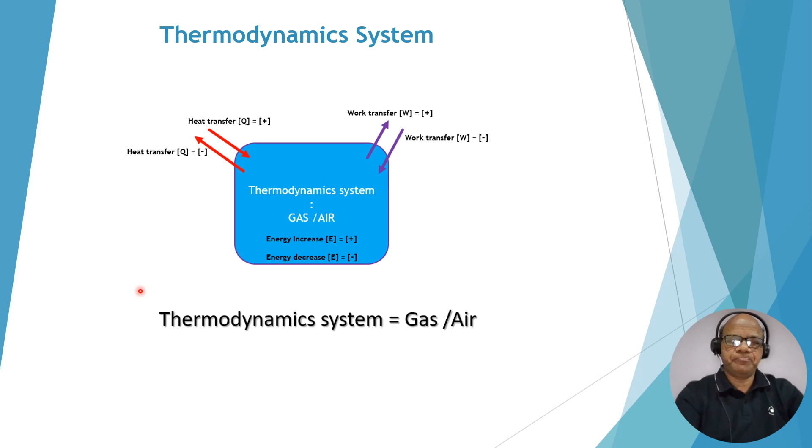So the focal point of the thermodynamic system is the gas.

Types of thermodynamic systems: open system, closed system, and isolated system. In an open system, there is a flow of mass and energy exchange. In a closed system, there is no exchange of mass but only energy exchange. In an isolated system, there is neither exchange of mass nor energy, so it is called an isolated system.

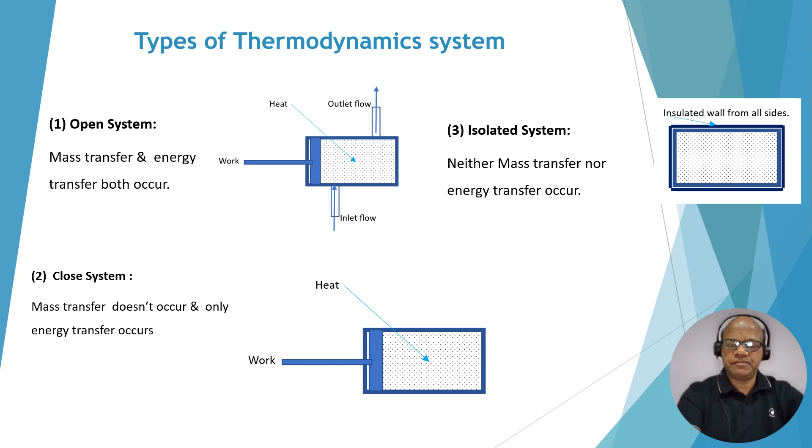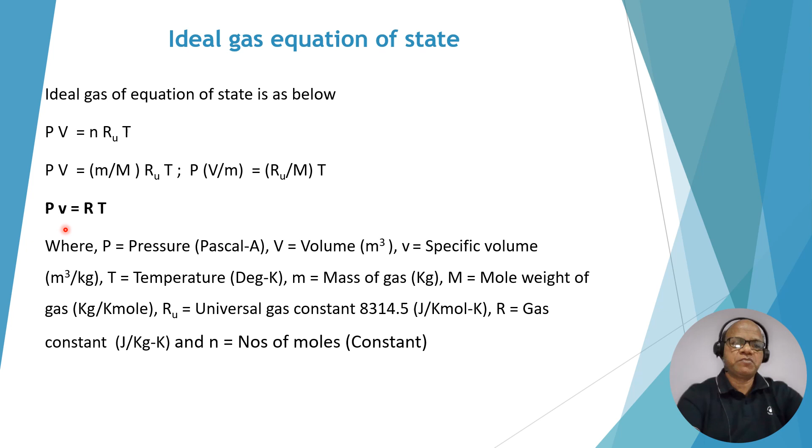Ideal gas equation of state: PV equals nRuT. On simplification we can write P small v equals RT, where P is pressure, v is specific volume, R is the gas constant, and T is the temperature.

Work done on a closed system. For the closed system, work done is written as the integration of PdV, and the area under the curve on the x-axis, that is on the PV diagram, is called work done or work transfer.

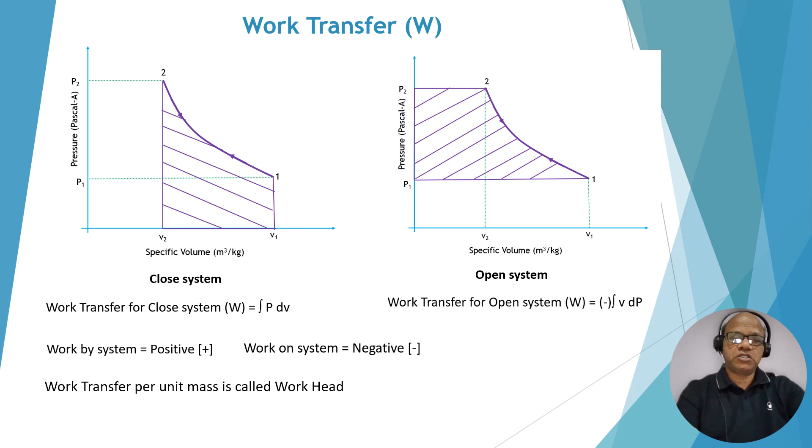Similarly, for the open system, it is written as minus VdP, and the area under the curve on the y-axis on the PV diagram is called the work done for the open system. Work done by the system is positive, work done on the system is negative, and work done per unit mass is called the work head or head.

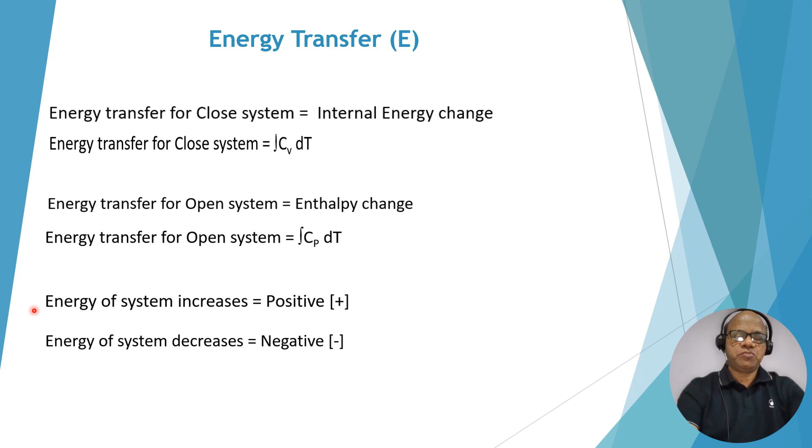Energy transfer for the closed system is called internal energy change, expressed as the integration of CvdT. Energy transfer for the open system is called enthalpy change, written as the integration of CpdT. Energy increase of the system is positive, energy decrease is considered negative.

The first law of thermodynamics can be used to find out the heat transfer. So heat transfer is equal to work transfer plus energy transfer, Q equals W plus E. Please note that the first law of thermodynamics assumes the efficiency of thermodynamic machines is 100%, meaning there are no losses during transfer of work, energy, or heat. So the first law of thermodynamics considers everything ideal, with no losses, 100% efficient.

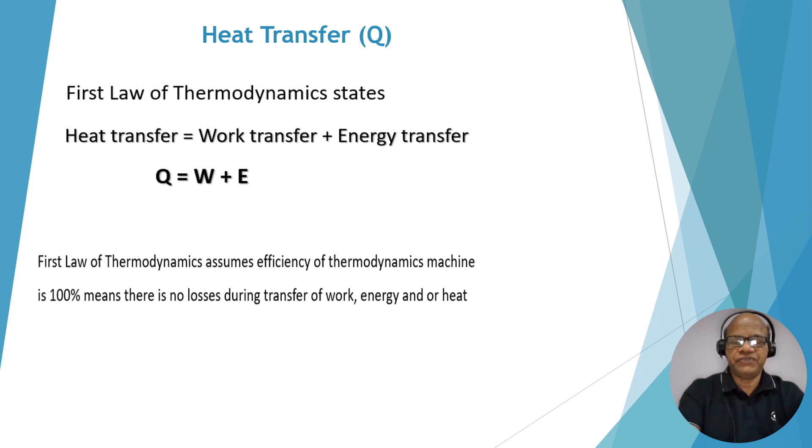The constant volume process is also called the isochoric process for the ideal gas. Let's say on a PV diagram, you can see the 1 and 2 process at constant volume, and similarly the 2 and 1 process as well.

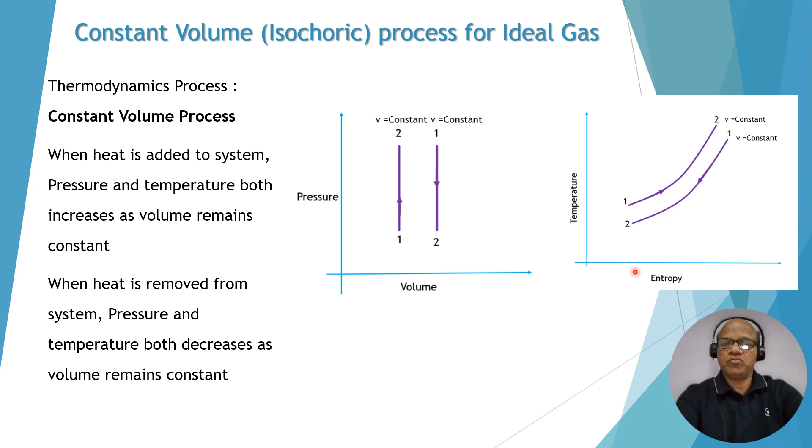In this process, heat is added; in the reverse process, heat is removed. Similarly, on the TS diagram, from 1 to 2, heat is added, temperature increases, entropy increases. From 2 to 1, heat is removed and entropy drops on the TS diagram.

So for the work transfer per unit mass for the closed system: since V is constant, we can write PV equals RT, so P1 equals RT1 and P2 equals RT2. Therefore P2 by P1 equals T2 by T1, and also we can use Cp minus Cv equals R for the ideal gas.

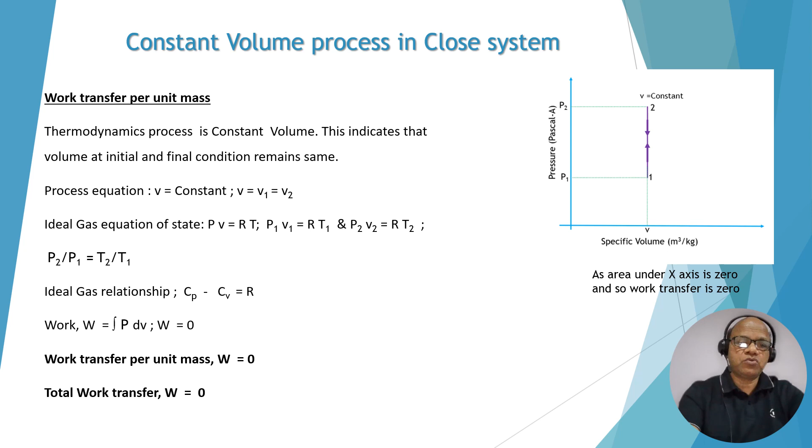Work done for the closed system is PdV; since there is no change of volume, the work is zero. You can see the area under the curve on the x-axis is zero because it is a straight line, so the work transfer per unit mass is zero, and the total work transfer is also zero, because multiplying by mass still gives zero.

Now for the constant volume process, the energy transfer for the closed system is written as the integration of CvdT. So Cv(T2 minus T1) is the energy transfer per unit mass, and the total energy transfer E equals m times Cv(T2 minus T1).

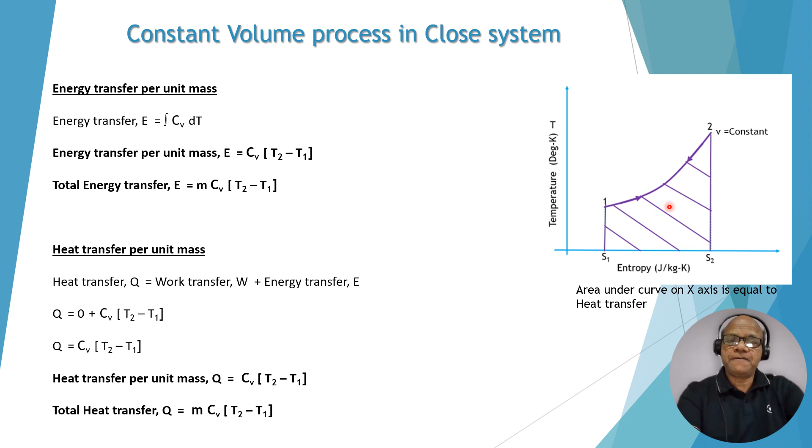For heat transfer, as per the first law of thermodynamics, Q equals W plus E. Since W is 0, Q equals Cv(T2 minus T1). So heat transfer per unit mass Q equals Cv(T2 minus T1), and for total heat transfer, M times Cv(T2 minus T1). You can see the area under the curve on the x-axis on the TS diagram gives the heat transfer, so you can see the heat transfer in this process.

Now entropy change 1 to 2 and 2 to 1. Entropy change is equal to Q upon T. Q is CV into T2 minus T1, so we can write CV dt. Entropy is equal to CV upon T into dt, so we can write CV log dt, which means ln, the natural log. So entropy change per unit mass S equals CV ln T2 by T1, and total entropy change S equals m into CV ln T2 by T1.

You can see the graph because of the increase. The graph is drawn based on this equation. Entropy change is based on the temperature ratio. If temperature ratio increases, entropy increases. If temperature decreases, entropy decreases, as per this equation.

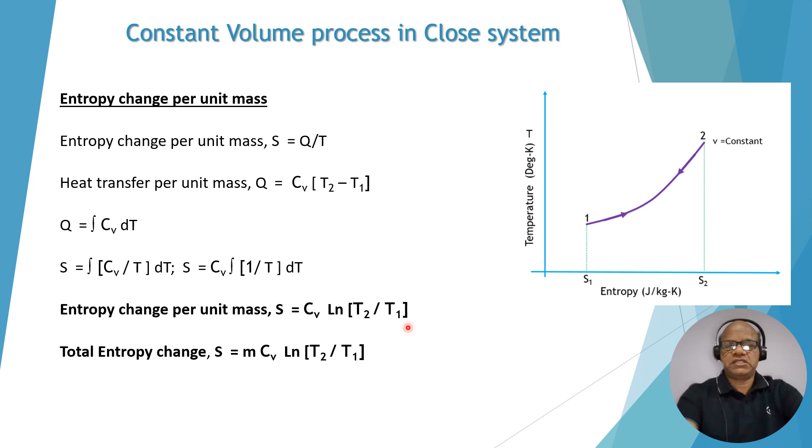Now the constant volume process for the open system. Again the volume will remain same. PV equals RT: P1V1 equals RT1, P2V2 equals RT2. So P2 by P1 equals T2 by T1... Cp minus Cv is R.

This is another relationship: work done is minus V dP, so we can write minus V into P2 minus P1, which is P1 minus P2. So W equals P1V1 into 1 minus P2 by P1, which we can write as W equals P1V1 bracket 1 minus P2 by P1. But we can replace P1V1 with RT1, so RT1 into 1 minus T2 by T1, because P2 by P1 can be replaced as T2 by T1. So W equals R into T1 minus T2.

So this is the work transfer per unit mass: W equals R into T1 minus T2, and total work transfer equals mass into R into T1 minus T2. This is for the open system.

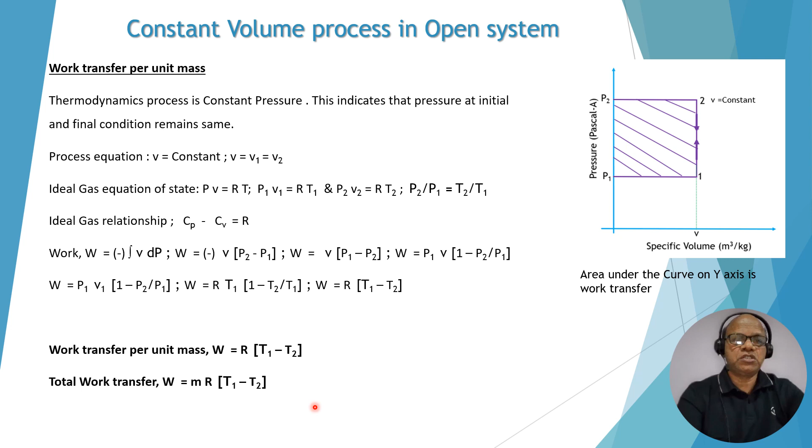Energy transfer, we can write as Cp dt, because for the open system E equals Cp into T2 minus T1. For total mass, M into Cp into T2 minus T1. So heat transfer, as per the first law of thermodynamics, Q equals W plus E. So we can add this, and taking T2 minus T1 as common, we get Cp minus R, and Cp minus R is Cv.

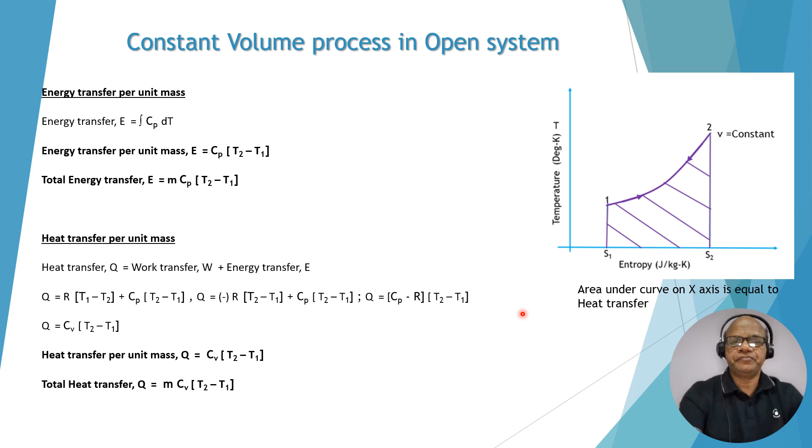So we can write Q equals Cv into T2 minus T1. Heat transfer per unit mass is Cv into T2 minus T1. For total mass, total heat transfer equals mass into M into Cv into T2 minus T1. This is the area under the curve, which again gives the heat transfer. Area under the curve on the x-axis gives the heat transfer.

Entropy change, we can write as Q upon T. Q is Cv into T2 minus T1, so Cv dt, Cv upon T into dt, so Cv into 1 upon T dt, and 1 upon T dt is a log, that is ln. So Cv ln T2 upon T1. This is the entropy change per unit mass.

For total mass, you have to multiply by M, and this graph is drawn on the TS diagram based on this equation. Temperature ratio increases, entropy increases. Temperature ratio decreases, entropy decreases.

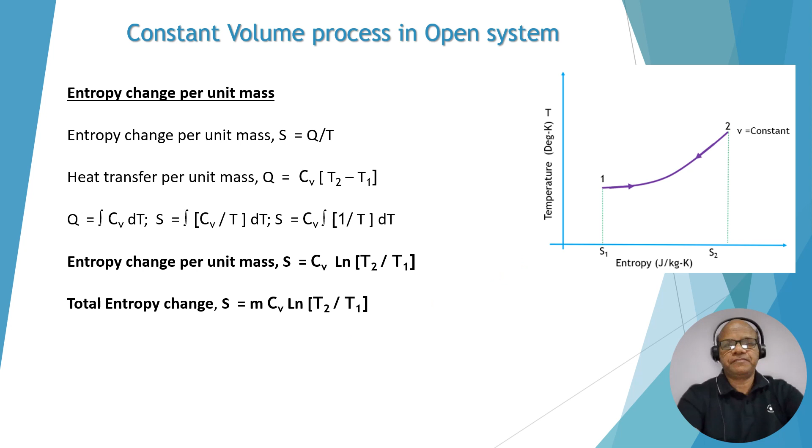So let's understand with an example. Nitrogen gas has initial pressure and temperature of 0.5 bar gauge and 30 degrees Celsius respectively. Heat is added to the thermodynamic system such that the final pressure reaches 0.80 bar gauge on a constant volume process. With consideration of ideal gas, calculate work, heat, energy transfer and entropy change during this process. For consideration of closed and open system, also calculate the inlet and outlet specific volume. The following data are given: mole weight of nitrogen 28 kg per kilomole, universal gas constant 8314.5 joule per kilomole per Kelvin, specific heat capacity at constant volume 20.86 kilojoule per kilomole per Kelvin, and local barometric pressure 1 bar absolute.

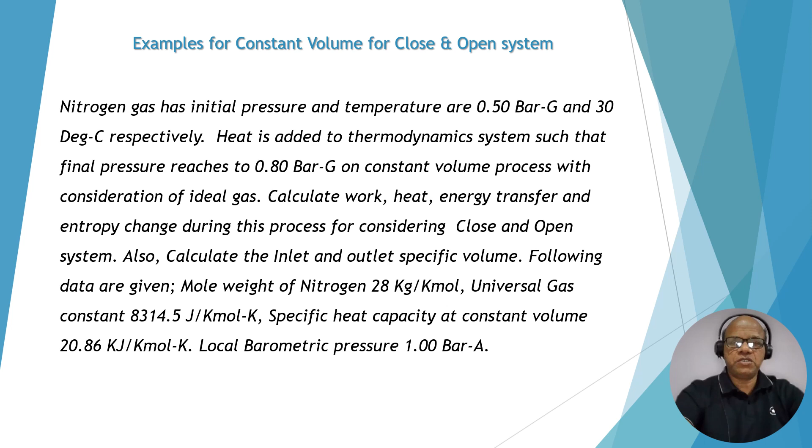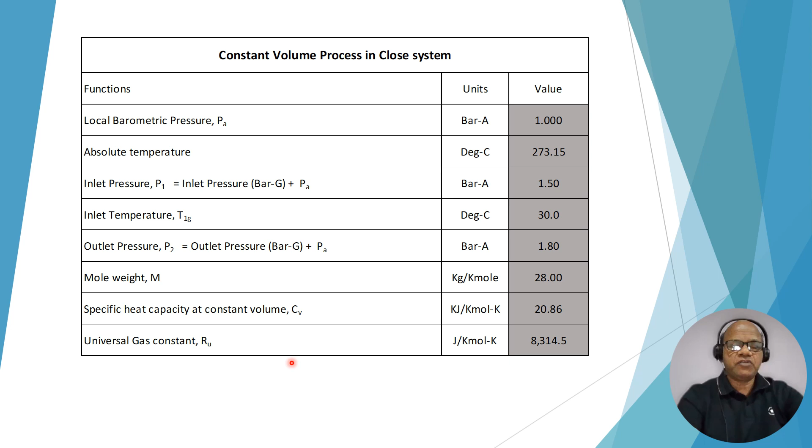So now we solve this question. These are the given values for the constant volume process: local barometric pressure, absolute temperature, inlet pressure P1 is gauge plus PA, that is local barometric pressure, giving 1.5. Temperature is 30 degrees. Outlet pressure is 1.8, because 0.8 plus 1 is 1.8. Mole weight is given, specific heat capacity at constant volume CV is given, and universal gas constant 8314.5 is also given. Now we need to do the calculation.

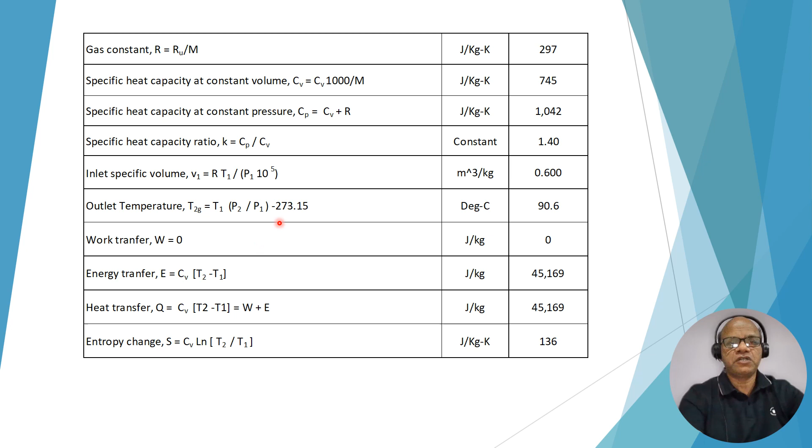Work done is 0 because it is constant volume, closed system. Heat energy transfer is Cv dt, which is 45,169. Heat transfer will be the same, since it's the summation of these two, and entropy change will be 136 joule per kg per Kelvin.

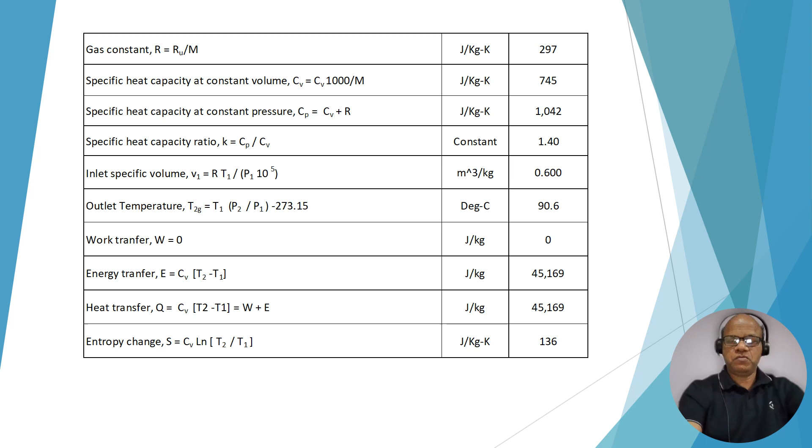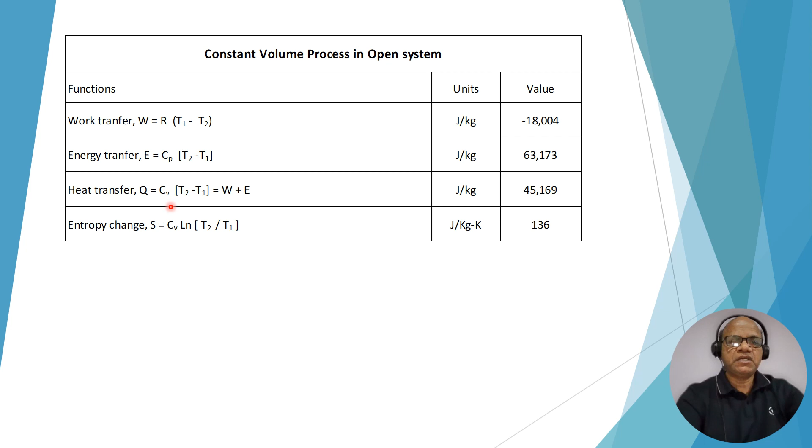For the open system, the only change will be the work transfer, which comes as R into T1 minus T2, equal to minus 18,004, and energy transfer is 63,173. Heat transfer will be the summation of these two, or we can write Cv into T2 minus T1, which is 45,169, and entropy change is 136.

So I hope you have enjoyed this session on the constant volume process. Thank you for watching.